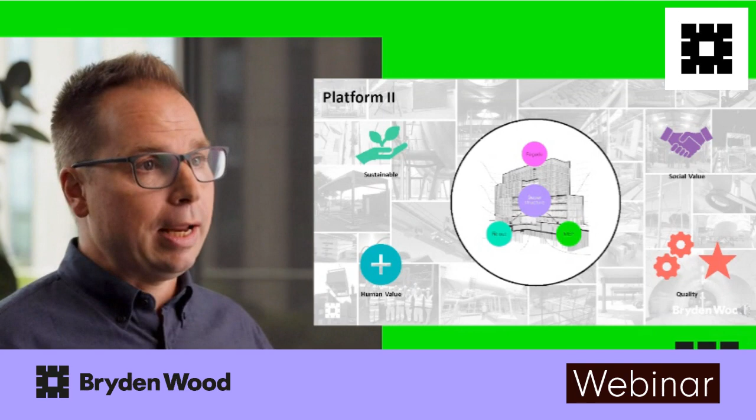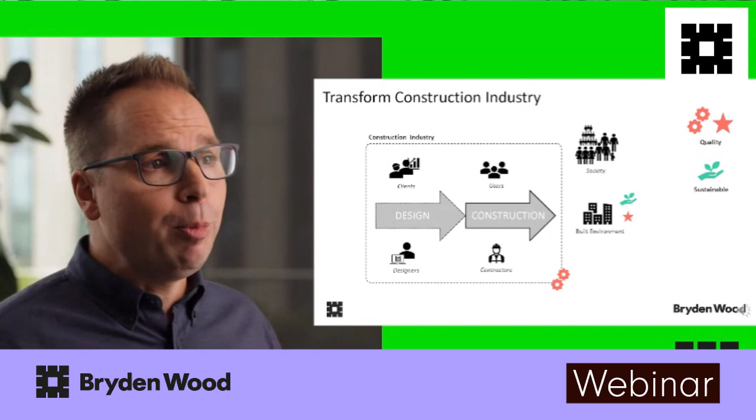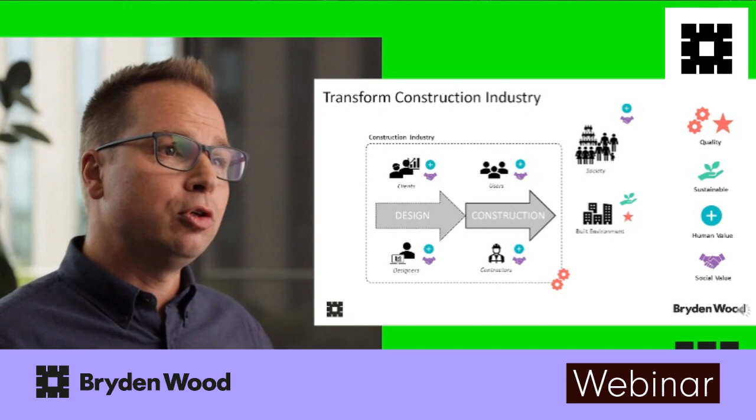The construction industry needs to be fundamentally transformed. It has a very poor productivity record because every building is treated as a unique project. To be able to address climate change and build the necessary social infrastructure, while the population ages and the skills gap increases, we need to transform it to become more like manufacturing so that it can produce high-quality products that are better for the environment. It also needs to be transformed in such a way that it delivers human and social value for all involved

and the wider society. To get these better economic, environmental, and social outcomes from the construction industry, we need to aggregate demand to achieve the necessary economies of scale. More standardization is required. Society's building and infrastructure requirements need to be analyzed to find commonalities and similarities, and then be harmonized and rationalized in such a way that allows us to come up with an optimized quantity of standardized components that are simple to produce and put together, but can be configured and combined with other systems to deliver the customer requirements for a wide variety of buildings across various sectors.

Analysis has shown there's a real opportunity to deliver 70% of the government's £15 billion portfolio this way. The government has committed to using its buying power to drive adoption of this platform approach. The Construction Innovation Hub issued guidance on how to create such a product platform and what characteristics it needs to have to be successful. Through well-designed, versatile components that can deliver a wide variety of buildings for a wide variety of clients, we can improve quality, productivity, cost and schedule.

The greatest scale of benefits is enabled by developing a product platform that harmonizes features of the superstructure, such as structural grids, beams, columns, connectors and slabs across different sectors. Key aspects of assets, like facade and fit-out, can all be incorporated into the approach, and a repeatable grid, common dimensions and standardized interfaces make it easier to install pre-manufactured MEP, fit-out and facade components into the platform carrier frame. The production of these components and their assembly can then be optimized to leverage benefits. Bryden Wood followed a process in line with the Construction Innovation Hub's guidance to develop exactly such a product.

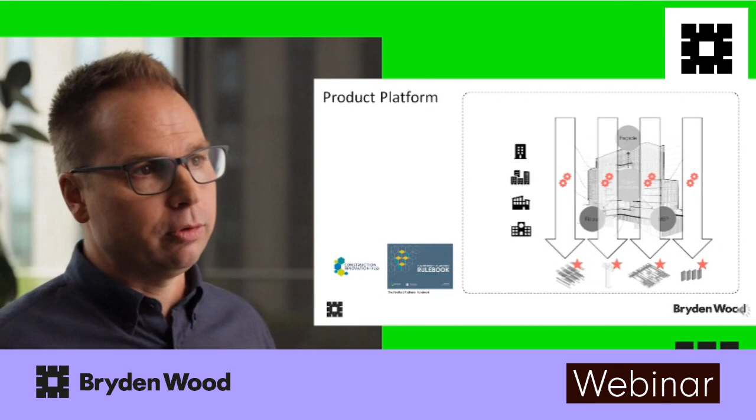This approach allows knowledge about design and construction to be captured in physical components that make up the product platform, but also in design configurators, manufacturing specifications, assembly manuals, and equipment. This means that procurement can change from expensively buying custom products and custom processes to one where clients buy manufactured components that can be configured automatically and more safely assembled by a lower skilled workforce using simpler, standardized processes.

To have the leanest possible solution, we designed the platform in such a way that all commodities are handled the fewest number of times by the fewest number of people via the least number of processes. We focused on reduced handling and labor and using more manufactured content. We then standardized and automated manufacture, assembly, and design processes where this can bring the right kinds of benefits. Together, all these innovations improved productivity and quality. They reduce cost, schedule, and carbon while providing better, safer jobs and more equal opportunities.

We developed Platform 2 through analysis of the upcoming pipelines of the various building typologies. We analyzed their layout, their MEP requirements, and their overall dimensions. The result is an optimized and versatile structural system that provides standardized interfaces for a series of complementary technologies to do the fit-out, MEP, and cladding. Through its design, it provides a high-tolerance framework and enables productivity improvements in these complementary elements. Platform 2 is a hybrid solution that takes advantage of the particular characteristics of particular materials to achieve its objectives. Steel has high compressive strength, it is accurate, consistent, and can be erected swiftly using simple processes.

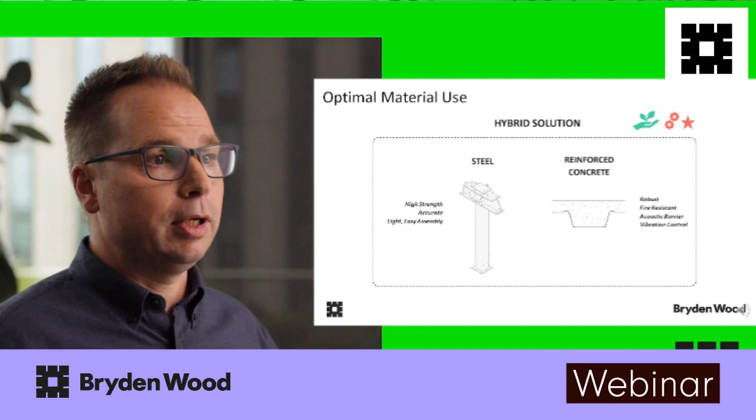It is relatively lightweight and lots of parts can be moved in a single vehicle movement. It is the ideal material for columns and connections. Concrete is good for compartmentation and acoustic separation and improved vibration behaviors. It is the ideal material for the structural build-up of the floors.

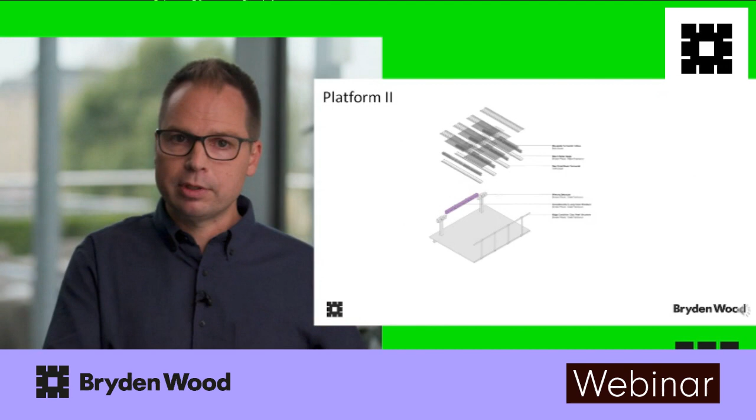The result is a system that consists of steel columns and cellular long-span beams and in-situ concrete floors. The columns and beams are bolted together. Concrete for the floors is pumped from below and robotically leveled.

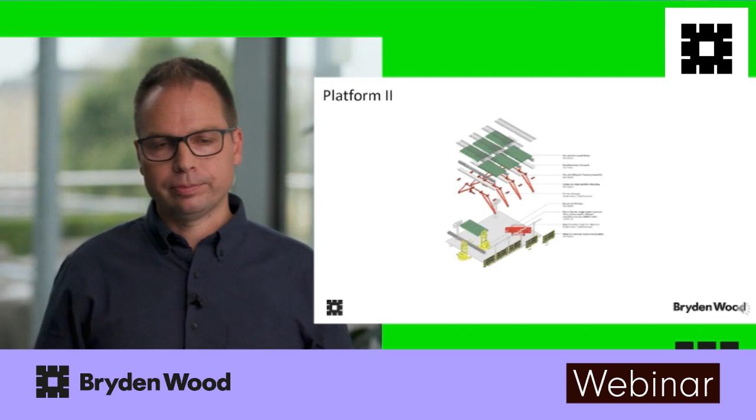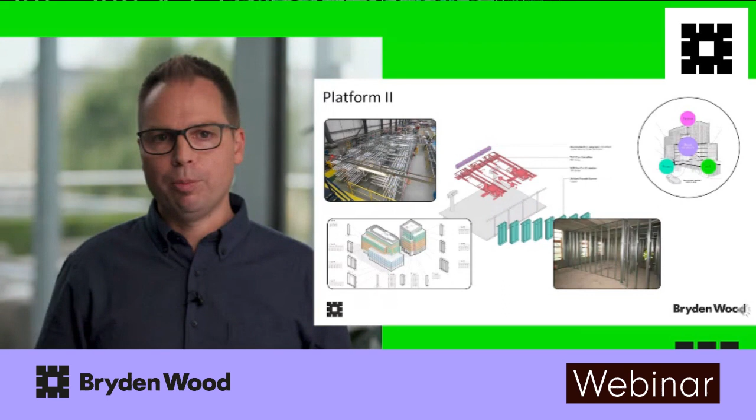Knowledge about assembly processes is captured in equipment and temporary work systems. Reusable formwork tables and propping systems make it easy to assemble and create the concrete floor with factory-like efficiency. Different industry standard solutions for the fit-out, MEP, and facade complement the structural platform to provide a complete building.

The system has been independently reviewed and checked. It is certified to BSI and UKCA standards. Certification is for the full factory control procedure, including procurement, processing, fabrication, storage, QA, and delivery, with documentation at every stage.

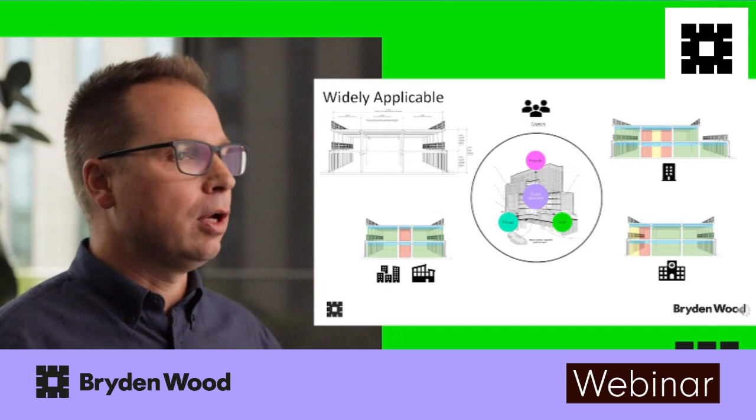Platform 2 can be configured to provide a range of different spans, heights, and layouts. The possible configurations are suitable to deliver residential buildings, hospitals, offices, and low-security prisons.

Because of these innovations, productivity has proven to be 40% higher, resulting in program reductions of at least 25% and up to 55%. This, together with effective use of materials, drives down costs significantly. The reduction of amount of material used, the reduction of waste produced during construction, and the reduction of time and human resources spent in the delivery of the project result in a 22% reduction in embodied carbon.

The way buildings are manufactured and assembled allows for a disaggregated supply chain, providing quality jobs and equal opportunities across the country. Because it's always the same components that are configured in standardized ways to create this wide range of building types, knowledge can be captured in digital component catalogs. Consequently, information about cost, schedule, and carbon is available and well understood from the outset.

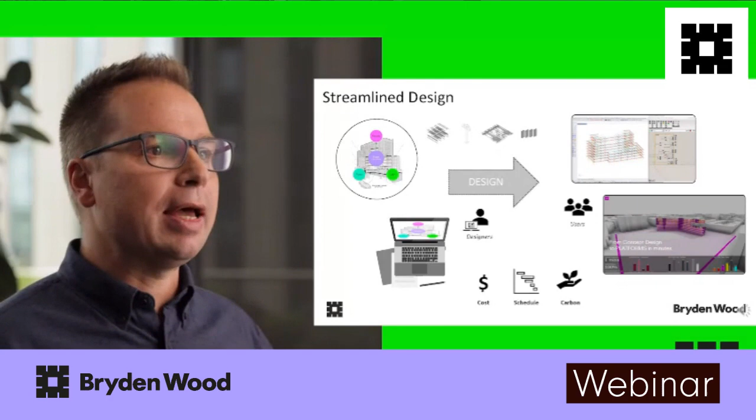Because the components are combined using strict rules, most of the repetitive, non-creative aspects of design can be captured in digital design configurators. This allows architects to engage with various users and stakeholders in a much richer way from an earlier stage.

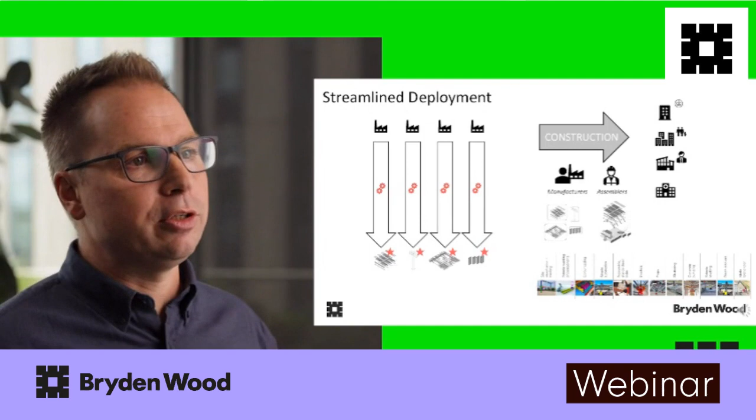Because components are identical across a wide range of building types and variations, the standardized processes to manufacture and assemble these components can be increasingly optimized and automated. This way, it becomes attractive to the supply chain to invest in innovations and benefit from the improvements they can bring.

Platform 2 is a transformative product. It consists of a series of standardized physical components, standardized processes for manufacture and assembly, and a design configurator. It is a product platform as defined by the platform rulebook. Standardized elements that can be mass-produced and can be configured to deliver a wide variety of non-identical buildings in a wide variety of contexts for a wide variety of users.

These interoperable elements have clear interfaces that can connect with existing systems. Through its lean design and flexibility, it is inherently sustainable, as the complementary systems can be changed throughout its lifetime and the structure reused to fulfill different architectural functions.

Structured information about components and how to put them together is available for clients, their designers, and the supply chain. This reduces uncertainty, improves quality, and allows for continuous improvement, which will benefit many clients and many suppliers. Continuous further innovations will make it an even more attractive way for clients to deliver their building portfolios. Competition will drive the supply chain to come up with even more efficient ways of delivering this product platform.

In short, Platform 2 is a major step in the realization of the government's vision to transform the construction industry to the benefit of all involved and wider society.